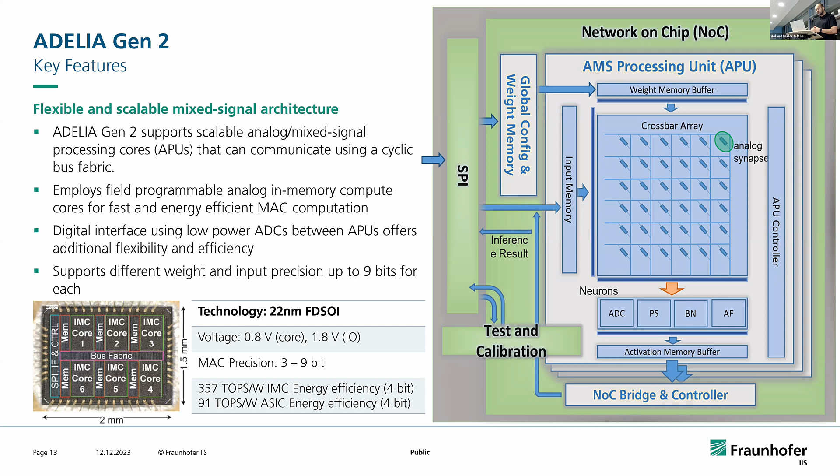Each of these APUs is field programmable to achieve as much flexibility as possible. And finally, all of this crossbar array and analog in-memory compute is supplemented by low-power ADCs to interface to the digital, where we can achieve the maximum flexibility but keep our efficiency. And the architecture supports different weight and input precision, up to 9 bits for each of these inputs and weights. So that was the architecture in general.

And one of these architectures that we made and fabricated was a 6-core chip. It was made in the project Andante, and it has 1 kilobyte of instruction memory, a network on chip controller, and digital and analog test circuits. Each APU has 256 times 64 synapses, so these are all the connections that we have. Each of these has 3-bit signed precision. Of course, we can combine multiple of these columns to generate higher precision if needed.

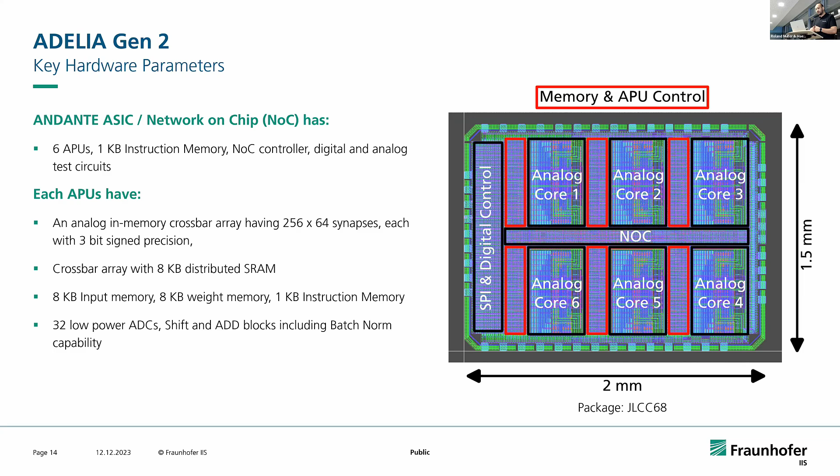Each crossbar array has 8K byte distributed SRAM, 8K byte input memory, 8K byte weight memory, and 1K byte instruction memory. And each of them is complemented with 32 low-power ADCs, in addition to shift and add blocks that can do batch normalization. So with this brief introduction of our hardware, we want to now talk mainly about the focus, the tools.

Such hardware, we realized early on, requires a lot of software development to achieve fast design cycles, and to be able to optimize and train neural network models that run on such hardware. And for this, we designed our own tool flow that I will present now briefly, then go into detail on each of these blocks. So we start here at the top in blue with the neural network hardware generator. This is mainly used to generate layout and schematic for our hardware using the description that we provide.

Second, we move to hardware-aware training. This is the training tool that we use to produce a quantized, robust neural network model that runs on our hardware and produces the same accuracy that we see in training on the accelerator. That quantized model is then fed to a mapper and compiler tool that generates our compiled program. And this compiled program can immediately be deployed and run on our hardware using the deployment and runtime API.

Finally, the whole workflow is complemented with 2 tools that do architecture exploration and simulation and KPI estimation. Both of these generate metrics and KPIs that are very important to the optimization of both our hardware, using the system architecture where we update our architecture, and our neural network models that run on the accelerator, by updating the neural network model details.

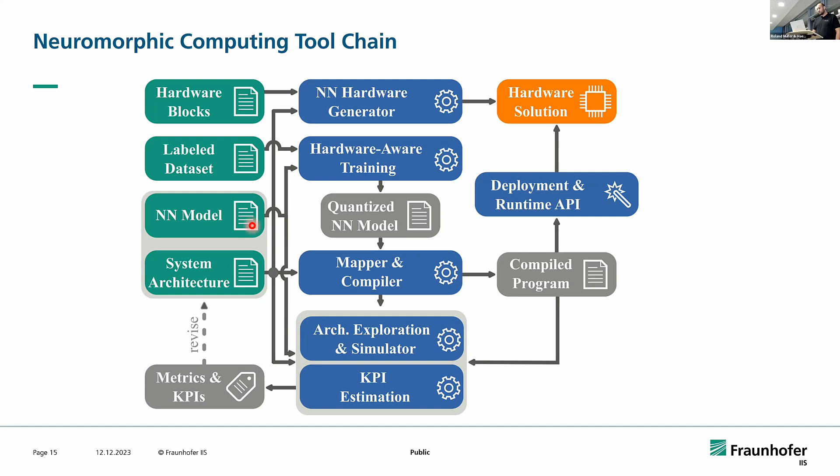So let's now maybe dive a bit deeper into each of these tools. First, we have the training part, where we have our hardware-aware training that produces the quantized neural network model, or at least it should be robust as well. It requires a labeled dataset and the neural network details.

So if we go deeper and we explain why we need this tool. First, we have the quantization-aware training part, and this is the first step to achieve low energy by reducing the precision we need in our operations. So if we reduce the precision of the weights and inputs, we can achieve higher calculations with less energy required. Neural networks are robust to quantization to a degree, but eventually we need some quantization-aware training to go as low as possible. For this, we mainly use or extend on Brevitas, and that does the quantization part.

So here I have on the left the torch layer that has weights, inputs, bias, and produces an output. This is a generic torch layer. What the Brevitas team did is they produced this layer that injects quantization details into either weights, inputs, bias, or output. And you can put a quantizer or no quantizer at all, so you can just pass them as floating points. But the torch layer itself is the same layer that can still be run on GPU,

can still be trained as normal. Of course, the quantizer has a lot of different parameters that can be set individually for each layer, for each parameter in the network. For example, scale, number of bits, if you want to delay the quantizer for a few iterations of the training, what is the zero point, and many others that you can set and configure easily. Now, we have mainly used Brevitas, extended it a little bit to suit our needs for our hardware when needed, but mostly this is out of the box from an open source library.

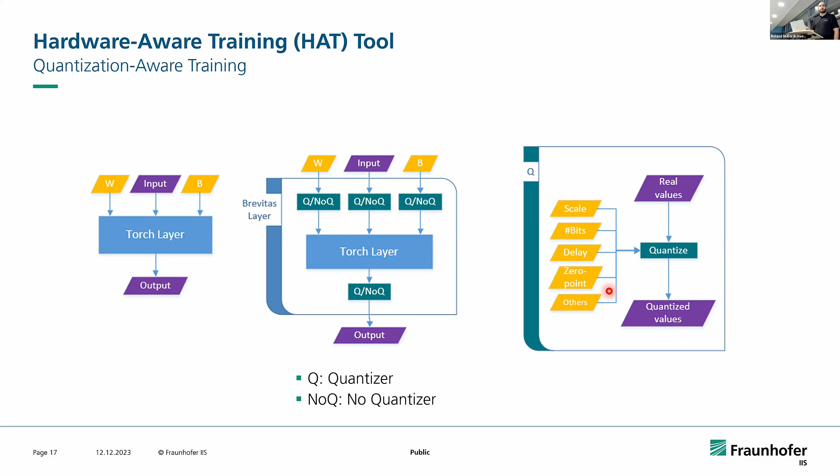So for this purpose, we introduced fault-aware training, where we take account of this mismatch and faults, the one I showed as an example, but there are other faults, bit errors or noise of the actual values of the activations, which can be introduced in our tool to mimic the behavior of the hardware accelerator so that when we actually deploy the network, we get the same results. And for this, we devised the hardware-aware training layer.

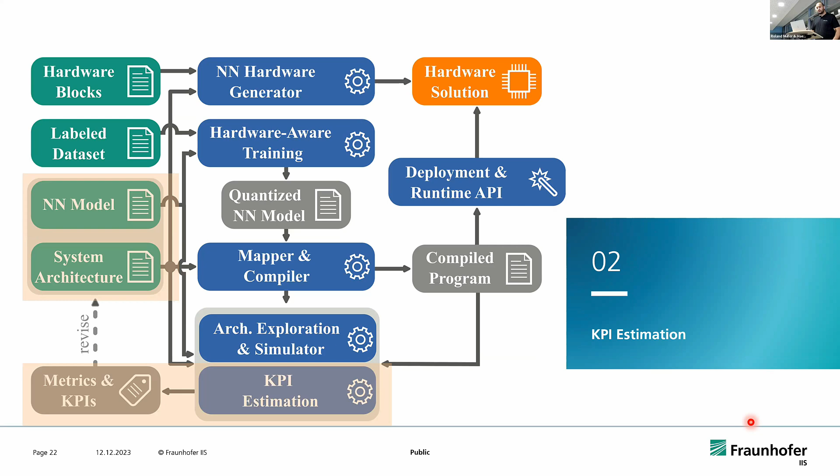The second part of the tool flow I would talk about is the KPI estimation. And this is very important to optimize our neural network models for our accelerator. We found that if you design the correct neural network model, you can get a lot of improvements from the actual accelerators you are running this on. So to be able to do that fast, you want to do KPI estimation to determine not just the accuracy you're getting on the accelerator, but also how much energy and latency you're getting.

And for this, our current KPI estimator assumes ideal mapping and takes the neural network information, so how many layers we have, and for each layer, the number of MAC operations, number of parameters, and quantization. This detail, in addition to the architecture descriptions, so how many cores we have, how many processing elements are in each core, and what SRAMs and global SRAMs we have, is all used to calculate, using a reference table, the actual energy and latency that a network would produce.

However, this assumes ideal mapping, which means we assume each MAC operation on the hardware will be fully utilized, we can read the data as fast as needed, and everything works ideally. In practice this is not always right, and that's why we have the mapping-aware estimator. Here, instead of using the neural network information directly, where we just assume everything runs perfectly, we actually take the mapped neural network.

And the mapped neural network is produced by the mapper. We will explain it later in more detail, but in essence, it contains how the load of the neural network is mapped onto each of the operations and memory in the hardware. This is converted into an action counts table, so how many actions should be performed to carry out the computation in the mapped network. This, together with the architecture description and the reference table, gives us a more accurate estimation of the latency and energy of a neural network.

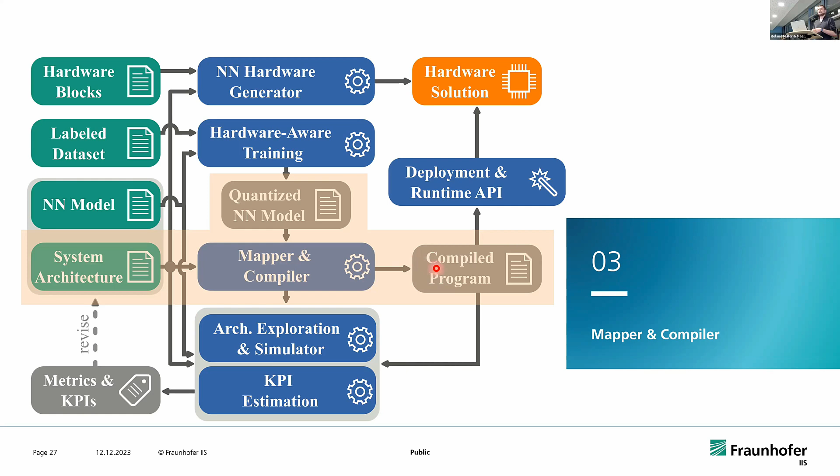And the mapper actually has the job to distribute the workload onto our chip, such that we get a compiled program which is then executed on the actual hardware. And where is this within the toolchain? So we saw we have the neural network model. Here it's mentioned PyTorch, but most likely it's going to be output from our hardware-aware training tool. Then we have ONNX, which is a custom ONNX, also containing the quantization information. And that then goes into mapper and compiler, and there we get instructions for our custom hardware.

So what's inside the mapper then? The first part is just to check, is the data actually in the correct format? So we get the ONNX file, we read it, and we walk through it and see, is everything correct? Can that actually be theoretically mapped? That's the first check to give the user a clear indication, okay, there's something wrong or we can go on. Next step then is parsing the information into a graph. So the neural network will be represented as a graph. And the parser does that by going through the ONNX file, converting the information into something we can use inside the mapper, and then it builds a linked graph to represent the neural network.

Next step is analyzing the graph we just created to understand the data flow, how things are connected and what we actually need on the hardware. And then it gets actually into the mapping step. And what the mapper does there is creating a map space. And the map space basically contains all kinds of different mappings. So neural networks can be mapped in different ways onto our hardware. We see that on the next slide. And this is a huge map space. So there might be thousands, tens of thousands of possible mappings to execute the same neural network on our chip. And this means out of the map space, we then have to select one mapping that suits our use case and our requirements.

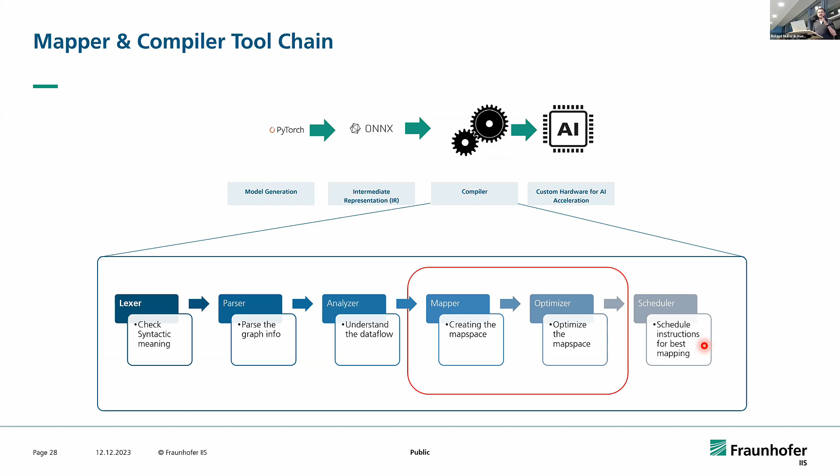And finally, the selected mapping then is given to the scheduler, which creates the instructions for our custom hardware. And the main workload is actually there in mapping and optimizing because it's just such a huge map space.

And the second thing is, if we reload those weights, because we have to exchange them, this also takes time, so that reduces our throughput. But the advantage of that would be that we might use 2 cores less. So we could build a smaller accelerator and therefore save some silicon area. So there you can see where the impact of mapping actually lies in.

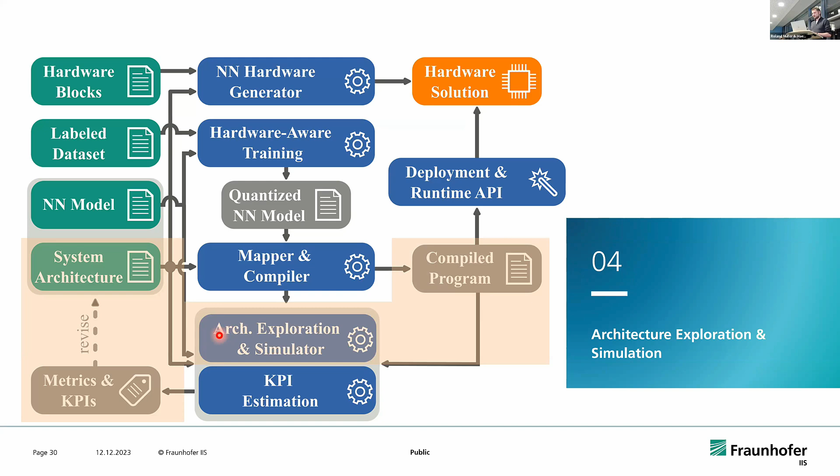The next step is then architecture exploration and simulation, and that's even closer to the hardware, because here we want to define how our system should actually look like. So what we have as an input is a system architecture. There might be multiple variants of this, and we have our compiled neural network, and this goes then into architecture exploration and simulation. And what are the goals of these tools?

First of all, what we want to do is, before we actually implement the circuits on silicon, we want to see what are the best options. What should be actually implemented, and for that we need a high-level architectural simulation where we can see what influence the architectural decisions have on the performance of our future ASIC.

And that's divided into two parts. The first thing is architecture structure exploration. So that's where we actually check what different combinations of how we can implement these circuits will influence the behavior. And this might include, for example, how many cores we want to have. Should there be global or local memories? Do we need multiple hierarchies of cache memories? Or what kind of on-chip communication we want to use? So those are the decisions we want to take in structural architecture exploration.

And how we do that, and that's all down to making it faster than actually implementing it in hardware or in simulating it. We keep the functionality where it's allowed on a very abstract level. So on some blocks of our circuits, we don't really need the exact modeling of them, we just need a behavioral description. And that leads to a low implementation effort, and therefore we can do this architecture exploration quite fast.

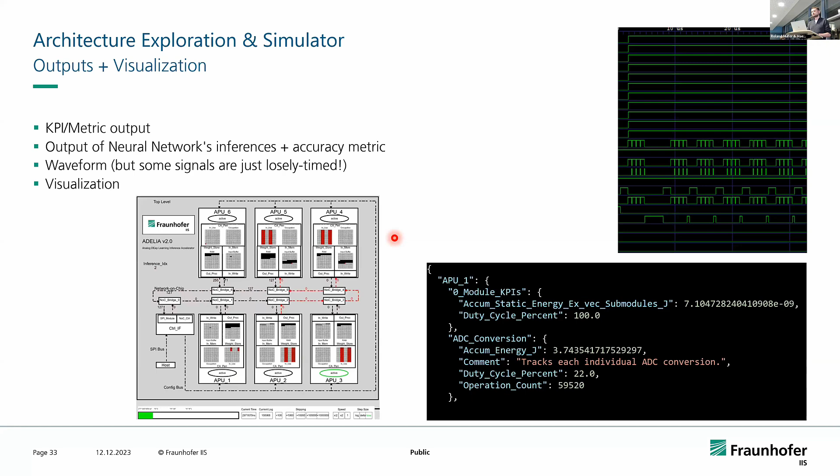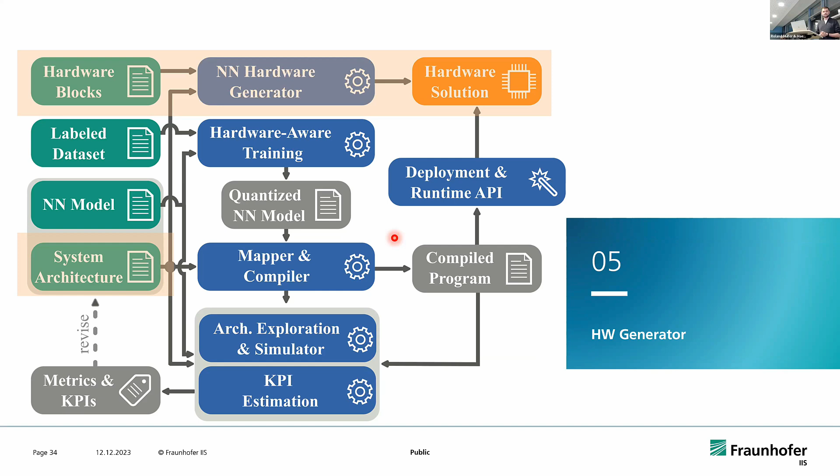Then the next step, another step closer to the hardware, is actually a neural network hardware generation tool. The first question is why we actually need this. Why do we need to automate? We want to automate the design of our neural network accelerators.

But in the case of neural network accelerators, we have more than 10,000 circuit instances. In this example, it's 16,000 circuit instances. So it takes a very long time to do all of this manually, and therefore we have a long time to market. We want to reduce that, and therefore we need automation.

The next thing is we want to make our design process a bit more robust. That's also down to the size and complexity of the circuits. There are multiple millions of circuit nodes, thousands of pins, and that leads to the situation that there might already be errors in the schematic design and therefore in the layout design.

We can't catch them in simulation, because simulating these circuits with actual use case data, we estimated would take 100 years or even more. So we can't catch the errors in simulation at the complete chip level.

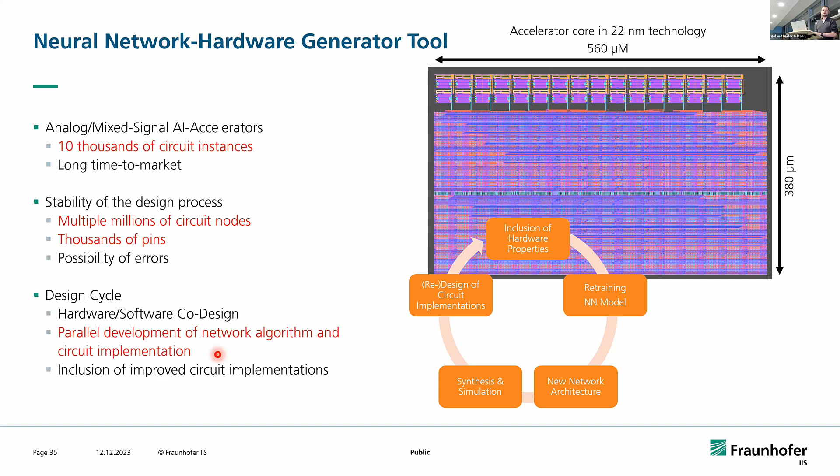How it works is we have a set of standard cells, synapse and neuron cells for example. We feed them into our synthesis flow, where we first create multiple configurations of how we could do the schematic layout. They go then into performance estimation, which is also back to the KPI estimation, but more on a detailed analog circuit level.

We select the best suiting block for that design, so the best suiting standard cells, and that goes into synthesis, and finally we try to do at least some simulations to see if we match the requirements.

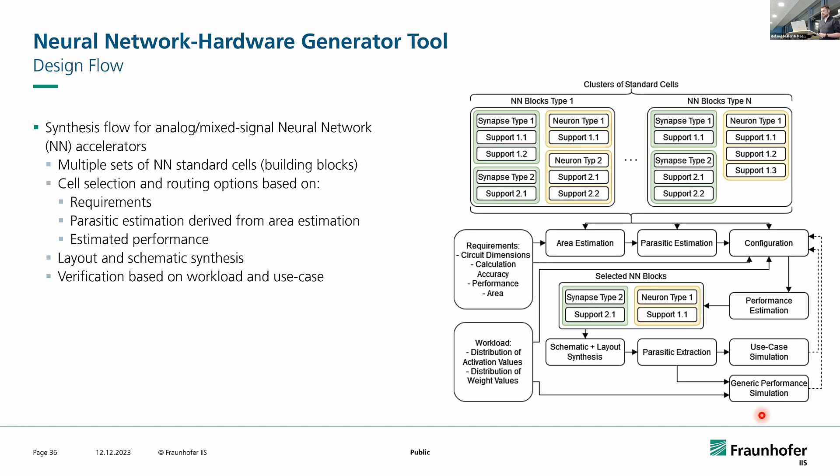With that, what we achieved is that from having a neural network and architecture and configuration, in less than half an hour we can actually get the complete circuits.

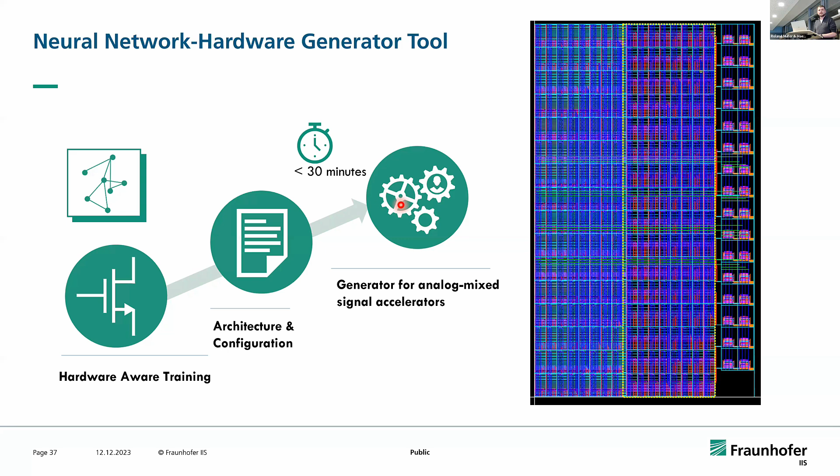If we compare that to how long it would have taken us to do the circuits manually, we estimated it here for 3 different designs, where the tool had a runtime of 30 minutes in the first one and 5 minutes in the other two, compared to an estimated 1 to 3 months of manual design time. So we greatly reduced the time needed to get our circuits designed, which helps us in reducing the time to market.

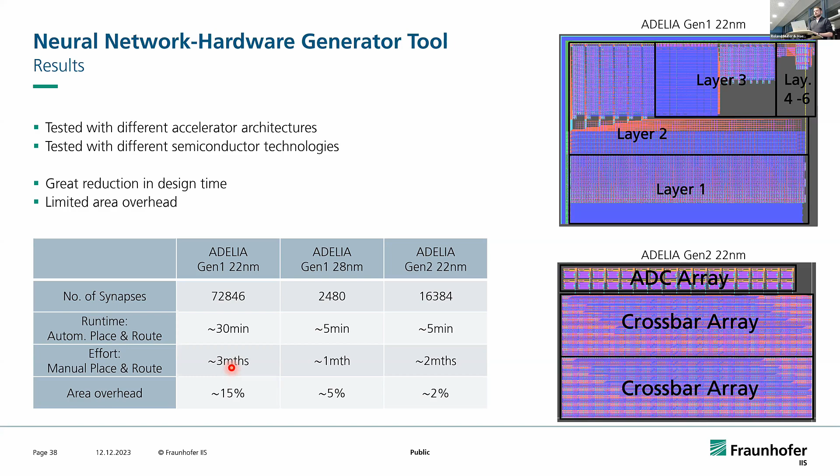Final step then is the runtime API for ASIC characterization and also demonstrating our circuits in a real-world environment. In this case, what this does is actually executing the neural network on the chip. So it takes the compiled program and a labeled data set, and that's fed into the hardware, and we run the neural network.

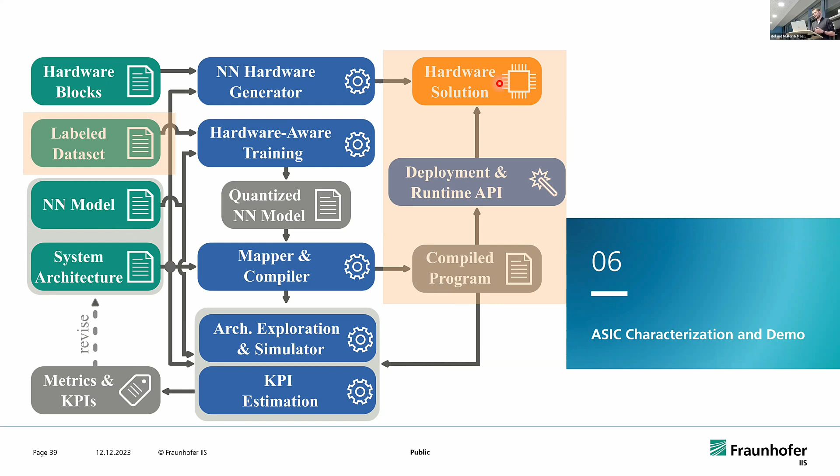We have 2 different setups for this. The first one is for characterizing the ASICs, and that's in the lab for measurement. We have a fully automated test setup, which first configures the ASIC on startup and then runs some test patterns for the neural network. While running it, we measure the power consumption, log the input data, the output data, and also some analog values. With that, we can verify that the complete chip works and also that the neural network works.

And why does this have to be automated? To check all the features on the chip and all the weights, for example, there's a very high number of test patterns. So doing that manually wouldn't be possible. That's why we have to automate it, to be able to verify completely.

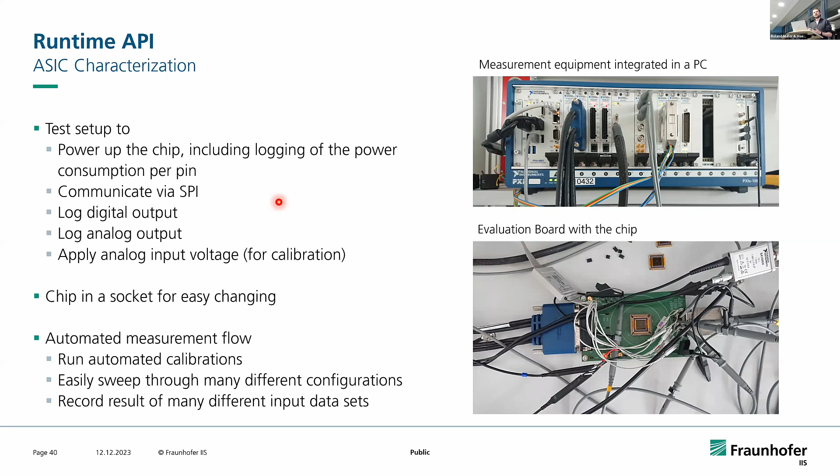On that we can run different tests. We can use live voice - this was the voice activity detection use case. So we can run live voice activity detection with a microphone input. We can measure the power consumption, or we can run our data set to see if the accuracy on that platform actually matches what we saw in measurement and also in simulation.

That then finally shows: with our chips and the complete toolchain, we can execute neural networks in a real-world environment in a robust way. And that's about it, about our toolchain.